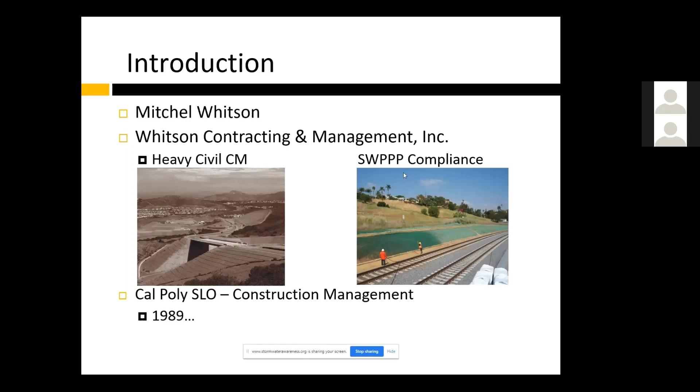We've proven time and time again that if you implement solid low impact development technologies, you're going to reduce the cost of the project and reduce the maintenance of the project - that's just a fact, proven time and time again. So we've always been a heavy civil CM firm. Normally in these presentations I'm talking about stormwater permit compliance - industrial, construction. Whitson Contracting and Management is about 95% construction, industrial, municipal stormwater compliance. Our construction management projects typically revolve around a design build project for a tank system or something along those lines. So we're embedded in the stormwater market.

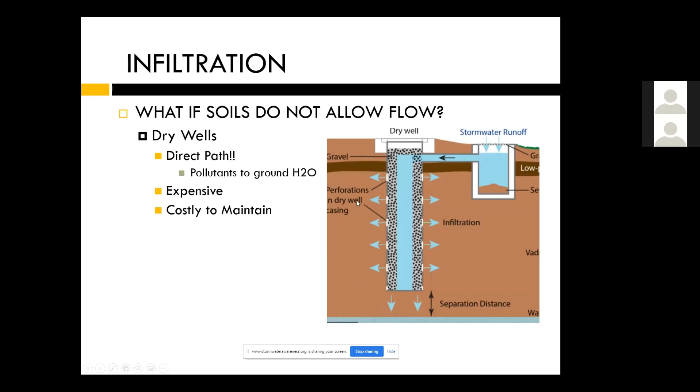Also, this is kind of a misnomer. It shows water infiltrating on the side, but not really. 98% of the water that goes through a system is through the bottom, because the weight of the water is forcing it down. You get very little, if any, infiltration at the very top of the system. So they're expensive, they don't really work, and they're costly to maintain. It's a hole in the ground filled with rock. I see some people put fancy little structures on them, which is fine.

Well, if we're really trying to infiltrate, there are technologies. If you guys are interested, please reach out because we can do deep dives into different types of technology. In fact, we host webinars every Wednesday at noon where we go over permeable paving systems, low impact development, structural solutions, storage infiltration systems, and filtration systems in a running loop.

One of the technologies we talk about in our infiltration and storage session is a product called Parjana. It's difficult to get into fully in this short time, but in essence, we drill basically 1 3/4 inch holes and put a 1.5 inch tubule in there. We put caps on top, and you get this micro-collapse around each one. What happens is water leaves this top area, flows down the tubule, and starts to saturate that zone. Because they're put in a 2-foot grid, with 5, 10, 20, and 40-foot grids laid out, we're changing the flow characteristics in impermeable soils.

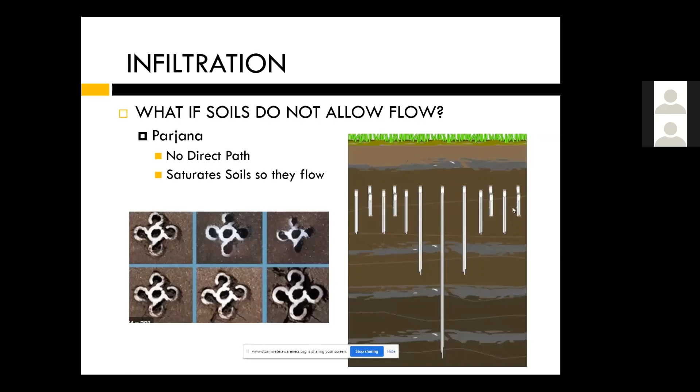So we've got a job going on in Stockton where we took a site with less than about 0.03 inches per hour infiltration and we're going to bring it up to just about 1 inch per hour, for $200,000. That seems like a lot of money, but considering the tank size reduction, because we now create infiltration, it's worth it.

Here's an example of the power of the technology. This is a job done for the city of Fresno. They did pre-Parjana, they had an infiltration basin, and they were losing all of their water due to basically evaporation — 70% of the water in that recharge basin was being lost. When they installed it, over the span of 2,500 days, several years, they only infiltrated 29.82 acre feet.

Within less than a year of doing the Parjana system, we're testing the groundwater. There's no direct path from the top to the bottom. It's going through the soil, so it's actually being treated as it goes through the system. We've now infiltrated 69.72 acre feet of water in less than a year.

So instead of only infiltrating 30% of the water, we're now infiltrating 90.47% of the water. There are technologies, even with non-permeable soils, that you can implement to actually achieve good infiltration. Again, fairly complicated—this is a presentation all on its own. If you guys are interested, let me know, but this is a really neat system. It's changing the way we're managing projects. We're reducing tank sizes, we're reducing basin sizes. We're doing some pretty significant things with this technology.

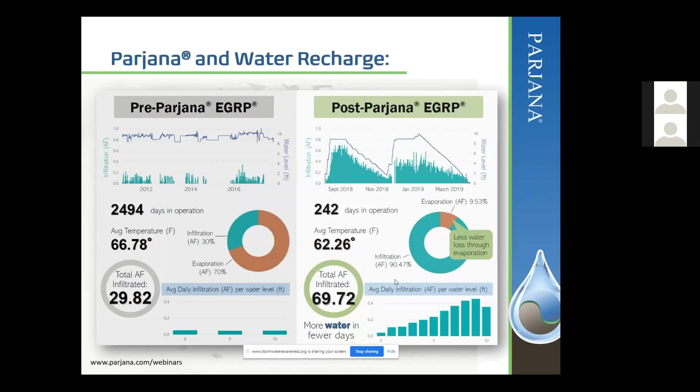If you can't infiltrate, then somebody a long time ago coined the phrase bioretention. So let's just do a bioretention basin, we're going to mimic nature. You know, I don't like the term bioretention, and the reason is because what they've done is combined two distinct concepts, two separate concepts. One is water quality, one is volume reduction, runoff reduction. And they tied these two at the hip, saying they're not interchangeable.

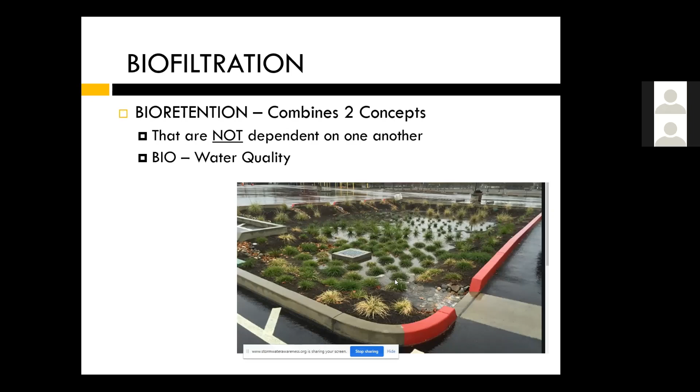You can take these apart, and you should take these apart, because you don't necessarily have to have a 5-inch-per-hour basin to work. In fact, I just built a winery project where we were the construction managers in Riverside County. It's got an industrial general permit, so we've got to deal with phosphates, nitrogen, nutrients—those things that come off industrial properties. We're discharging into a water body that's impaired for nutrients. And they say, okay, you have to do this basin that's 5 inches an hour, and the county spec is 60% sand, 40% compost, or 40% topsoil.

Prove to me that that's going to reduce pollutants. Also, more importantly, what happens when compost dries up and then gets wet and dries up and gets wet? It releases nitrates. So you're actually being forced, because you've got this dumb blend recipe of topsoil and sand, but there's no proof that it actually works.

There's probably some studies, but the system that I put in on my project—I used a certain blend from some guy out of Orange County, or actually Corona—show me the test data. I talked to all of these guys that produce this compost mix, this bioretention mix. Ask any of them for lab results. You're not going to get a very good response, because what they're doing is following a blend, and there's no proof in the pudding.

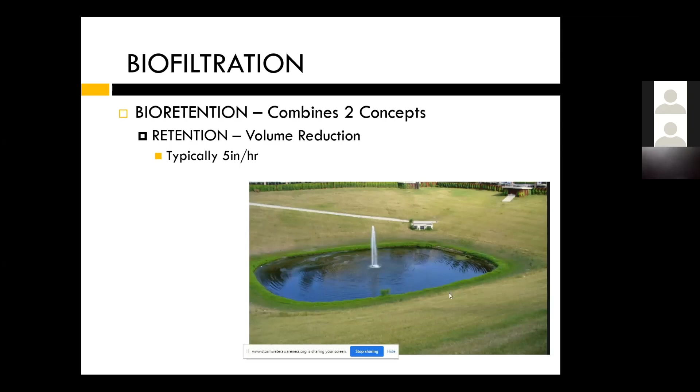So anyway, you can treat water quality at a high flow rate. In fact, you're going to get better results. You don't have to go 5 inches an hour to control the water. So they've taken two concepts and forced them together, and that's just not a good equation in my mind. It takes a lot of land. So biofiltration—we're 20 to 30 times smaller in our footprint.

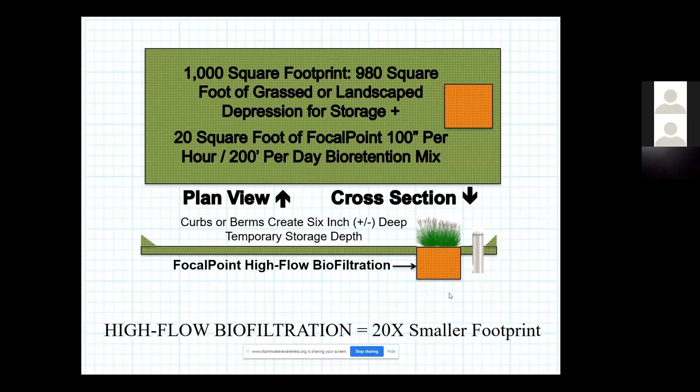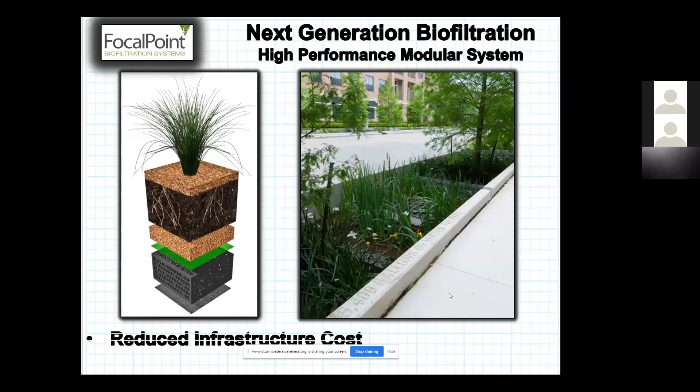Anyways, I'm going to keep going here. So we do have high flow biofiltration—you do not have to go low and slow. Sorry, I don't like animations. We also have a biocarbon. So we have a TAPE-certified high flow biofiltration system called Focal Point.

Focal Point is basically Filterra without a box. The gentleman that invented Filterra invented our media simultaneously. Filterra's patents revolve around their box, but you don't want media in a box. Why do Filterra systems fail? Because you're putting a tree in a concrete box.

So anyways, same media, same results. In fact, better results. I'll show you some information in a moment. But yeah, we do have a solution, high flow biofiltration, not in a box.

We also have a high flow biocarbon solution. We're going through the process of finalizing our submission for TAPE, but it's a proprietary blend of biocarbon.

Carbon's awesome, and the reason we really like carbon is, think about your Brita water filter, think about the water filter in your office. That's carbon, that's all it is. The reason carbon's gotten a bad rap is because there's no consistency in the process of producing it, and there's no consistency in the source material.

We only use Evergreen biocarbon out of the East Coast. It's a very consistent source, a very consistent manufacturing process. More importantly, all of the information, all of the studies, all of the universities, they all use Evergreen biocarbon. So when you're reading papers on carbon, you're reading on the only source we use, which is Evergreen.

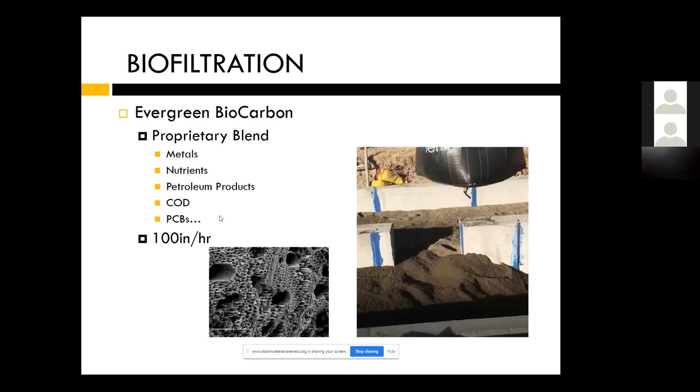It actually treats CODs. Our blend is specifically made to treat COD and BOD at wastewater facilities. So anyways, great product, let us know. Better for industrial applications because we don't have TAPE certification on it or an equivalent study, but we're in the process of doing that.

Filtration. So if you can't infiltrate and you can't biofilter, that's why you never see this in the development side, because the lowest letter in that rung, the lowest chain, is filtration. So filtration works, but the problem is it's a very site-specific, pollutant-specific model. What are you trying to treat?

Because different pollutants capture things for different reasons. So are you impacting? Are you intercepting? Are you absorbing? Are you doing ion exchange? Are you capturing? There's various technologies of filtration, so it's a very site-specific, pollutant-specific model.

We've got some cool filtration products. We've got the only licensed or certified antibacterial filter in the state of California, and the reason is it's a Fabco called FabGuard. It actually kills the bacteria. So the reason no one else has California Department of Pesticide Regulations certification for bacteria is because it's some type of capture or absorption technology.

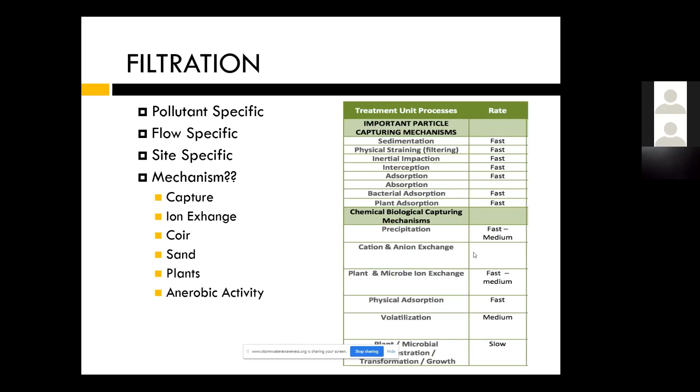So you're capturing the bacteria. You don't want to become a bacteria bed. Our Fabco system actually kills the bacteria. That's why it works. So we have filtration products.

Continuing along the vein of low impact development, this is a pretty important concept: decentralization. So what are we doing?

We've always designed storm drain systems by capturing that water, piping it to a standard pipe, piping it off that job. Old school technology, understand, but you go 12 inch, 15, 18, 48, and then you do that for a lot of reasons. One is you want to limit the number of discharge locations from a particular property. You also don't want dozens and dozens of manholes leaving a property because it's costly. You want a single one or two points of discharge off of a project.

Well, then all of a sudden we come around and start changing, like hey, guess what? In 2009, the runoff coefficient off a project pre and post development should not try to be equal, they must be equal. So what did we do?

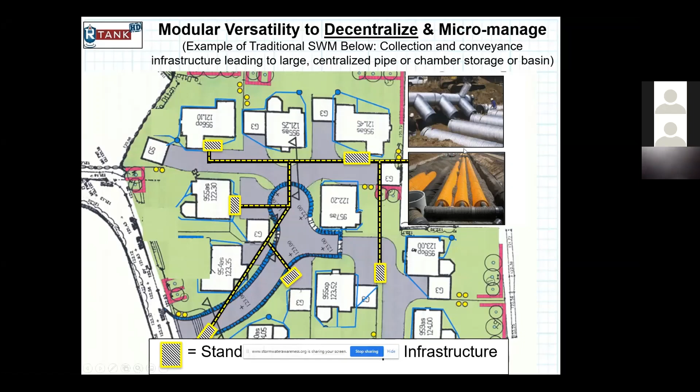We started building septic systems. We started taking lots, we started doing basins. Okay, these are 60% efficient because you've got 40% void space and you've got these pipes. So it's basically about 60%, I think it's a little over 60% efficiency of the system itself, what the void capacity of the system is.

We could do that, we could do it with an R-tank. We're going to reduce the size of your system, and the reason is we're 95% void space. So instead of 60%, we're going to reduce you by a minimum of a third. More importantly, we're not bound to be a wide flat system, we can make it look like wherever we want.

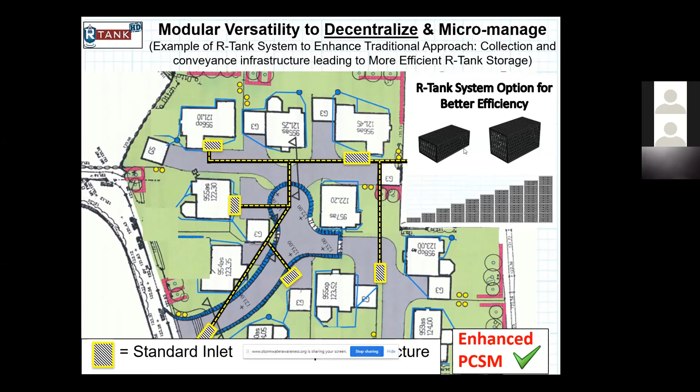Oh, but it's also modular, so we can put it wherever we want. So why are we taking lots? Why are we building big septic systems on projects? Why are we building vaults? It's ridiculous. We shouldn't be.

We should be treating DMA by DMA. We should be taking the individual drainage management areas, treating at the source, and containing at that source. Because what it's done is you've gotten rid of that vault. But as importantly, where's my storm drain system? You're eliminating your storm drain systems, or at a very minimum, reducing the size of your storm drain system.

So when I capture the water in this drainage management area, I can do my biofiltration through a focal point right here in this guy's planter bed around his park or in the front of his driveway. I can do an expanded R-tank underneath, and I basically capture both the water quality and the water volume off of this lot before it leaves. So even if there is a storm drain system, that system is going to be greatly reduced in size at a very minimum.

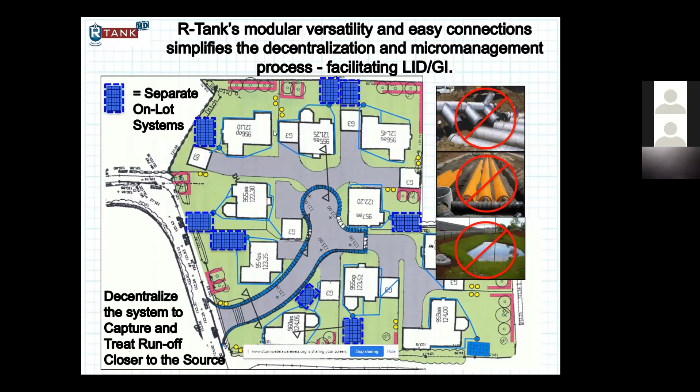So decentralization is a key concept when it comes to low impact development, and we need to really pay attention to that. Stop piping things to a big vault. Stop piping things to a septic system. It's silly. There's no reason we should be doing that.

One thing to really pay attention to, and here's a great example of the next concept I'm going to get into, which is permeable paving systems. Historically, we look at permeable paving systems, and the reason they're not popular is they're costly. People look at them and go, okay, I want a permeable paving system, but it's going to cost me $5 or $6 to pave this with asphalt. Pavers are going to cost me $10 to $15, $12 to $15. Why am I going to pay 2.5 times the surfacing cost versus an asphalt pavement? It doesn't make sense on the outside.

But if you consider the impacts to water treatment, water quality, and the runoff reduction component of the equation, permeable paving systems are the way to go. Here's a model of a job we did in Orange County, flowing through a focal point system, then into an R-tank. Everything goes through here. We have 250 square feet of focal point and a 5,300 cubic foot tank. That's the traditional model.

Okay, great, let's incorporate pavers. Let's incorporate, truly not a paver, I hate the word paver, but a permeable surfacing that's truly permeable. We're going to cut your cost by half. The reason is, while this is $10 and twice the cost of that asphalt, I've now created a giant pond above my treatment system. So I have surge capacity. I can hold that water before it goes through my system, much like I was telling you earlier with decentralization.

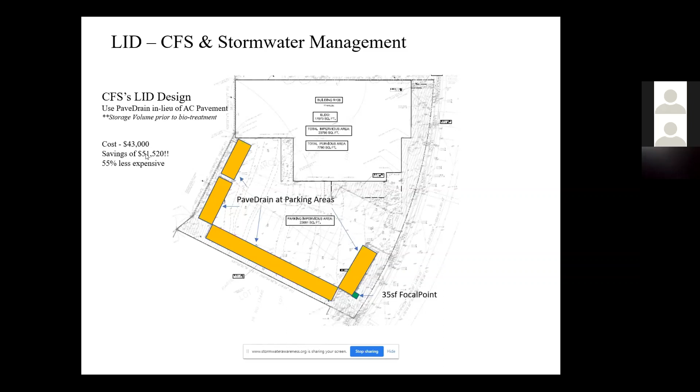Hold on to that water where you can, then slowly release it into your system. Your system is going to go from 200 square feet to 35 square feet, and you're going to save about half the money. So on the outside, paver systems don't make a lot of sense because it's like, well, I'm not going to spend $12 when I could spend $5. But think about the reduction in your storm drain cost, the sizing of your storm drain cost, the size of your biofiltration systems. You're reducing all of those across the board by implementing solid permeable paving technology.

So Whitson, California Filtration, is part of a network of regional manufacturers. We have tens of thousands of systems installed throughout the country. In California, we've done hundreds and hundreds of systems now, dozens of biofiltration, dozens of tanks, dozens of filtration systems. When I first started this, everyone's like, has Escondido done it? And then Escondido says, has San Marcos done it? I know we want to make certain the person next door does it, but we have now. So if you have questions about where we've installed or designed, let me know, we're absolutely installed in a neighboring community or in yours.

Talking about pavers, so why don't pavers work? Pavers don't work for a few reasons. The biggest reason is the void space. Even on permeable concrete or permeable asphalt, look at the void space, all the water is being forced through. So what they do is take pavers and fill these gaps in with aggregate.

Or with sand. They sweep sand into those joints. You're reducing the void space.

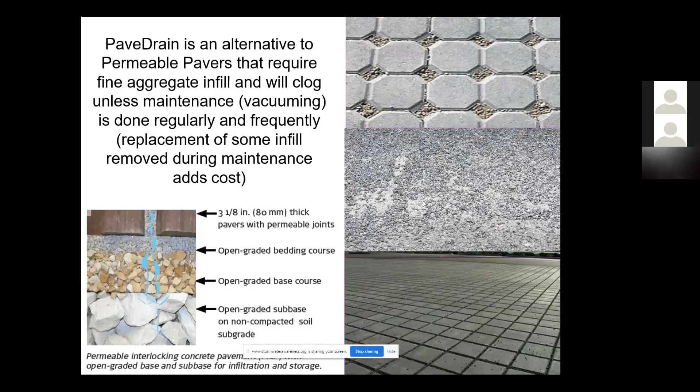Permeable concrete, I think, is ridiculous. Whoever does permeable concrete is just, why? Go to any parking lot that has permeable concrete, turn a tire on it, and watch that concrete dissolve. So A, it's going to clog. B, it's going to crumble. It's just not efficient technology.

Small pore space. The other thing that's a problem here in California is it's not like the East Coast, where you get 85% of your water from the 85th percentile storm. We get all of our water from very isolated storm events. We get 85% of our water from the 15% storm.

That means, you know, look at it. It's basically 0.02, 0.02, 0.3, 0.1, 0.4, 0.6, 0.1 inches here and there. So we basically get 8 months of dust going into the pores of this permeable system.

Then you get this sprinkling of rain. You get that 3 hundredths of an inch in September, that 100ths of an inch. And we take that dust and turn it into goop, and then we basically solidify it. Then all of a sudden you get one rain event and you're hoping it's going to flush the system. It's not. You're going to clog that system.

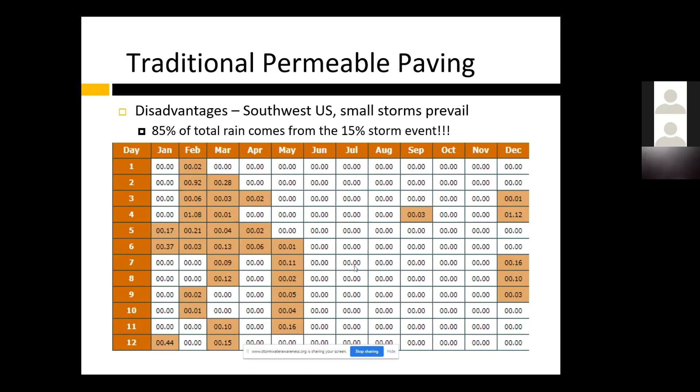In fact, the Brookings Institute says infiltration rate of porous asphalt and concrete will exceed 2,000 inches an hour when new, but long-term rate will fall as low as 2 inches per hour. So you're basically doing something you think is going to work, which you know for a fact is going to fail over time. So why are we doing it?

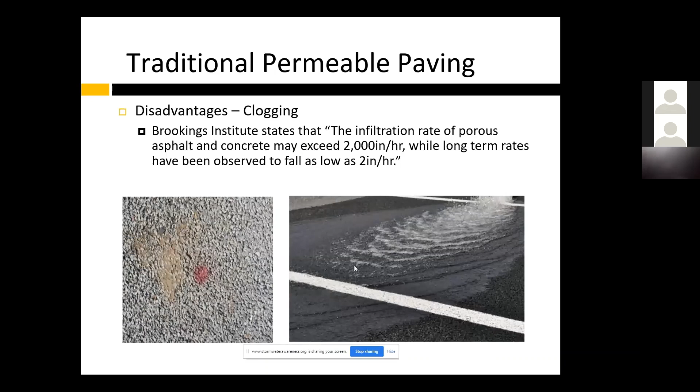We're wiping sand into our paving systems to lock them together. Paver systems are expensive. Why? Because we have to use an edge restraint, do variable surfaces, lock them together, put sand into joints. It's just super expensive, and it's a system designed for failure.

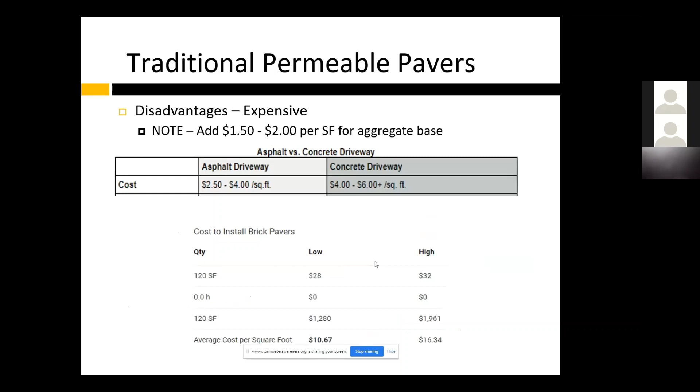Traditional paver systems, again, it's generally more expensive than asphalt. Oh sorry, I already did that. Sorry, I threw a couple presentations together at the last minute.

Instead of going with a paver system, go with a block system. Our PaveDrain block system always has a quarter inch gap. The flow rate is over 1,500 inches an hour, and it just doesn't clog.

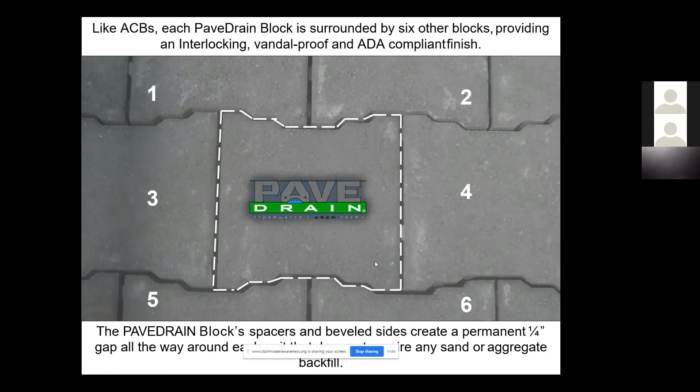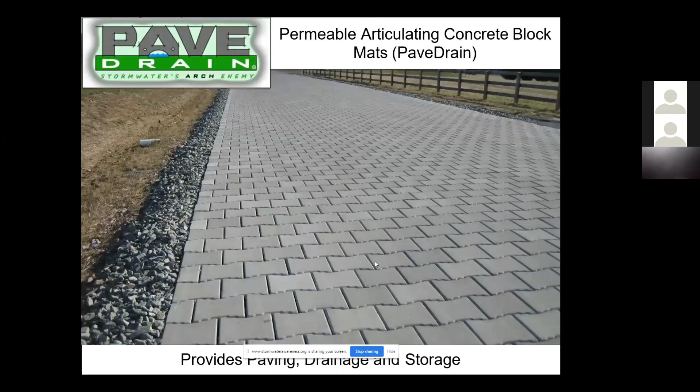The material cost is more expensive than the tiny little blocks. This is like $3 or $4 a square foot for the material. We're about $6 for material, but our placement cost is so small because I don't have to do an edge restraint, I don't have to put a curb next to it. So it's always got a quarter inch gap.

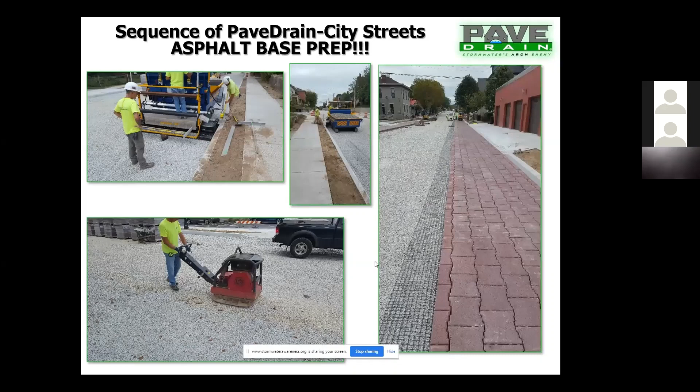It doesn't clog. We put down a base section, we put down the geotextiles. We always bed it on geotextile.

Go to a paver guy and ask him if you could pave right next to his block. I know the answer, and it's no. We want you paving against our block. It's a 50-pound block. We want you locking in the system. It's as structural as the asphalt, probably more structural, but you can pave next to it.

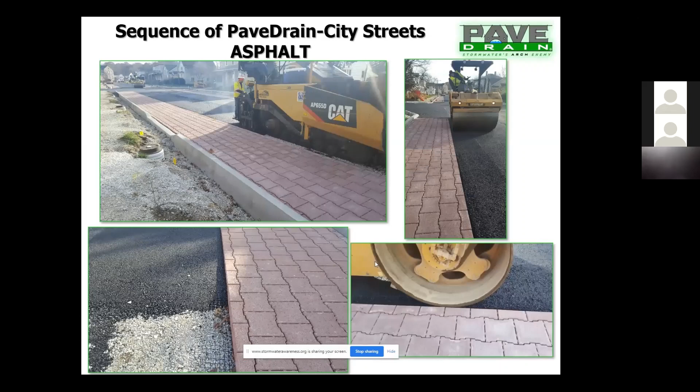You could drive on it. You can put the wheel right next to it. We want you paving next to our system. We don't demand a concrete curb around it so it doesn't clog. What do you get? An architectural element that reduces the size of your storm drain system. In fact, it becomes your storm drain system.

Do your parking stalls, we'll do enough. If you have permeability in your pavement, we're just going to do enough permeable pavement to infiltrate all the water you have to infiltrate. If not, we're going to use this as an actual storm drain system. We're going to break that subgrade one way or another, and flow it into a biofiltration system, just like the model I showed you earlier.

But now you have the same color palette you do of any other block, but you actually have a block that's functional. Pool decks, trench drains.

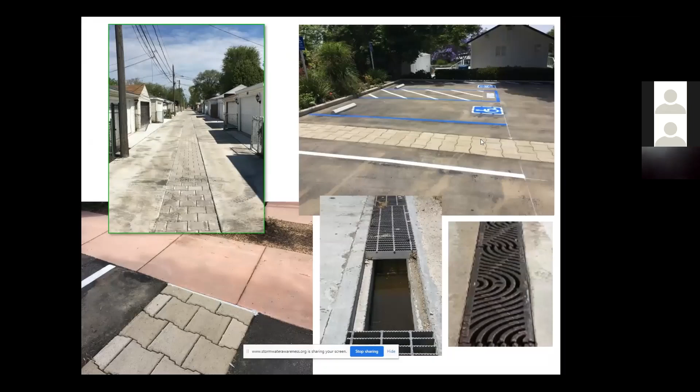Why do a cross gutter down an alley to flow off a project? Instead of using trench drains, why not use PaveDrain?

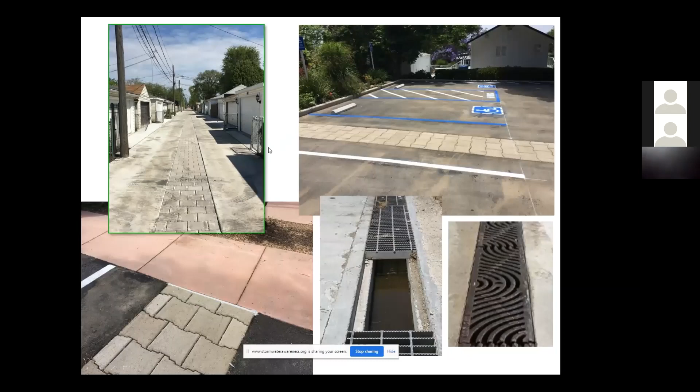This is a project in San Jose on First Street. Historic facility, a lot of flooding. They were going to spend $27,000 for a trench drain across this parking lot. Instead, we talked them into putting a $7,000 PaveDrain across the parking lot. We just line the bottom with an impermeable liner, put a perforated pipe in it, it flows into the trench drain. We're done. It's a really simple solution.

Edges of roadway, sides of roadway. We're doing a bunch of this up in the LA area where they want more permeable surfacing. This is heavy duty traffic loading, and we've gotten rid of all the gutters and all the other stuff.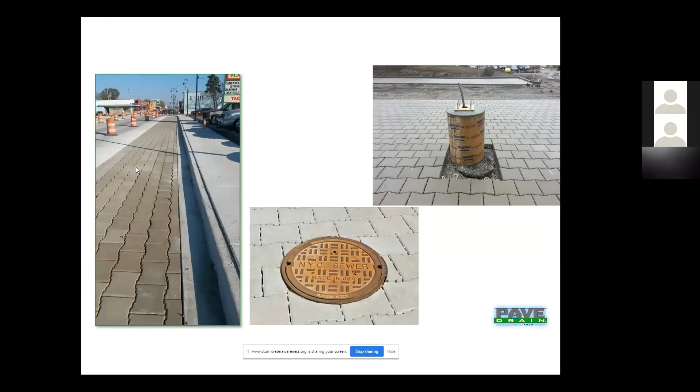This one's interesting. This shows you the power of paving. At the University of Central Florida, they wanted to figure it out. They said, okay, let's see how bad it is.

They filled it full of silt. They soaked that silt in, raked it in, clogged it in, and vacuumed it out. And it was still over, well, we started at 2,000 inches an hour, and then we're still over 1,800 inches per hour. And that's trying to destroy the system.

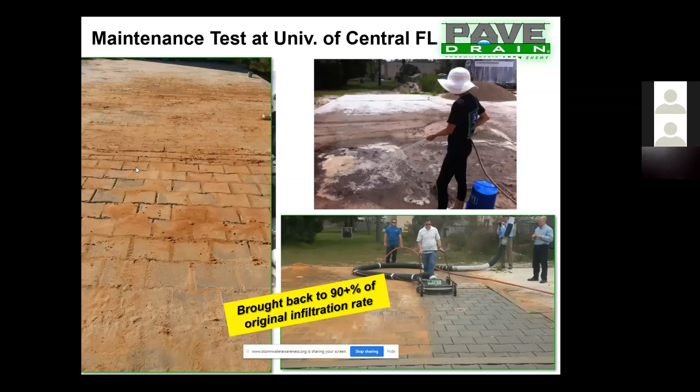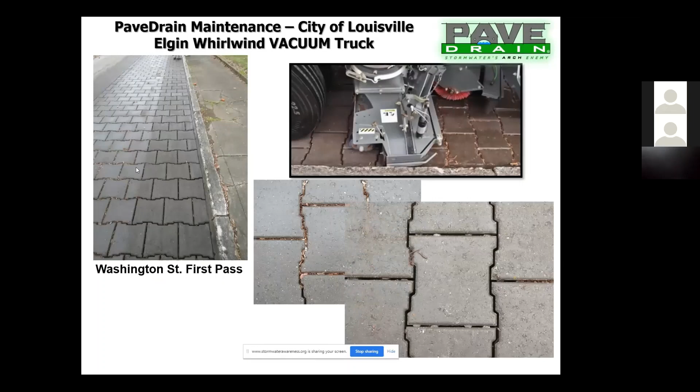We have systems up in the Sierras where they've done no maintenance. They just drive over it with a street vac, instead of using a street sweeper, actually use a street vac. Look how dirty that is on the front end. Drive over it with a whirlwind, an Elgin whirlwind, and it gets rid of all of that pre and post. So it doesn't clog, it just draws normal routine maintenance, and you have a paver system that actually functions.

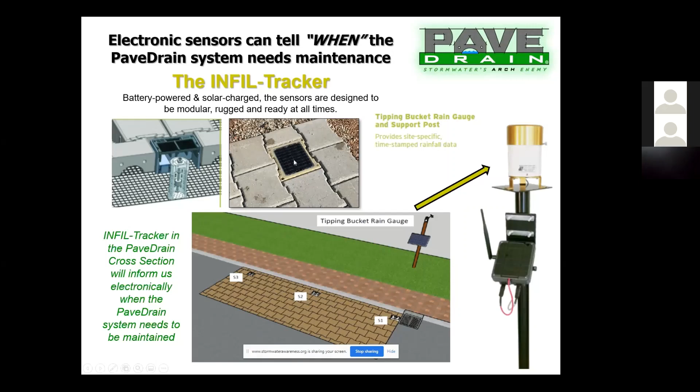If you guys are interested, there are grant funds out there for municipal people if you're actually trying to capture water and put it back in the ground. With our system, we could give you real-time data as to the amount of water you infiltrate with the PaveDrain system, using sensor blocks in our system, so we could basically track the amount of water you infiltrate back into the ground.

We have another permeable paving system. I'm going to go quick. This one's awesome, and the reason I like this one is because it's less expensive than asphalt. It comes with a 25-year manufacturer's warranty and is equivalent to 6 inches of asphalt over a structural section.

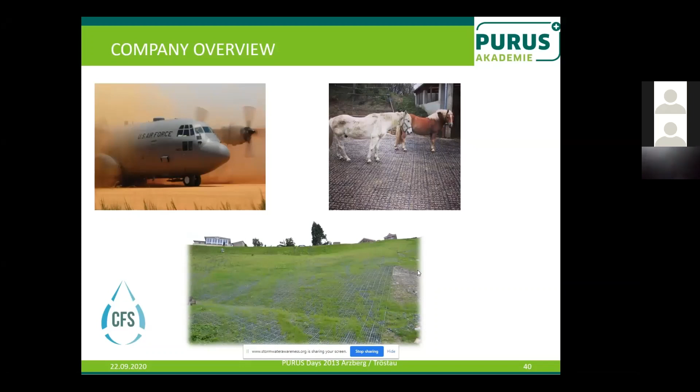The U.S. military lands airplanes on it throughout the world. It's what the U.S. military and NATO use at forward operating bases. We use it for equine facilities, slope failures, channel lining. It's 100% open grid, and it locks together.

It's a low density polyethylene, so it doesn't break, it never becomes brittle, it won't fall apart. It basically flexes and moves, but it doesn't fail. Because it's a low density polyethylene, it moves a little bit, but it's basically equivalent to 6 inches of asphalt. And you want to talk about sustainability?

It's made out of 100% recycled plastic bags. This grid is made out of 100% recycled plastic bags. I'll show you another version of it in a second, called blocks. Instead of using concrete blocks to fill it, we're using 100% recycled tire rubber—well, 95% recycled tire rubber with a binder. So now you have a paver system that flows at over 3,000 inches an hour, won't clog, is less expensive than asphalt, 100% permeable, has a 25-year life, and is made out of recycled products.

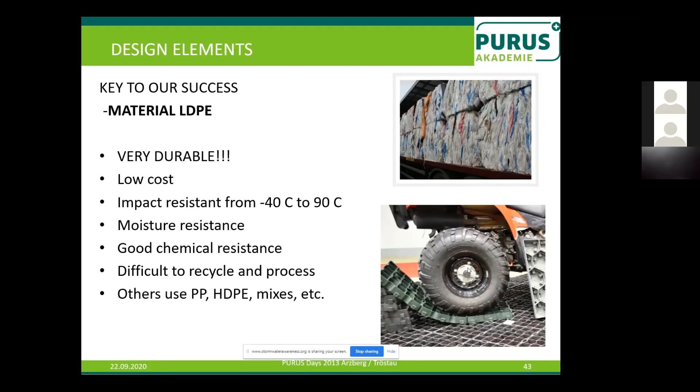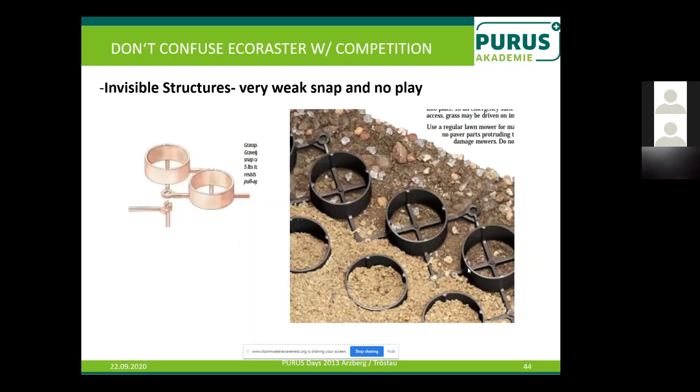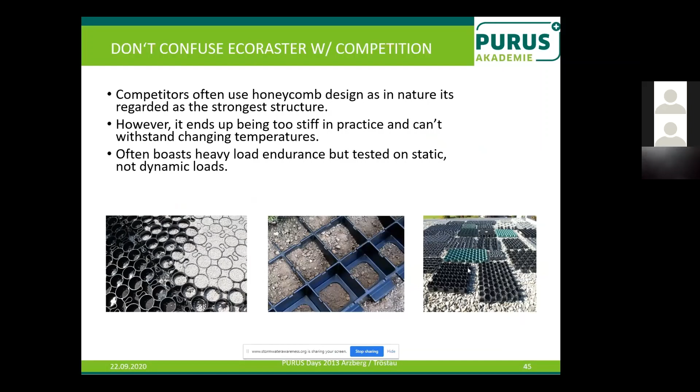Don't confuse EcoRaster with all the other nonsense in the market. It's a complicated system—it's high density polyethylene, and it will fail, and it'll fail immediately. Any of these grid systems, if it's not a low density polyethylene, avoid them. They're going to claim they're going to last. They're not. We've got 25 years, we're going to give you a warranty, because we've never had a failure in 25 years.

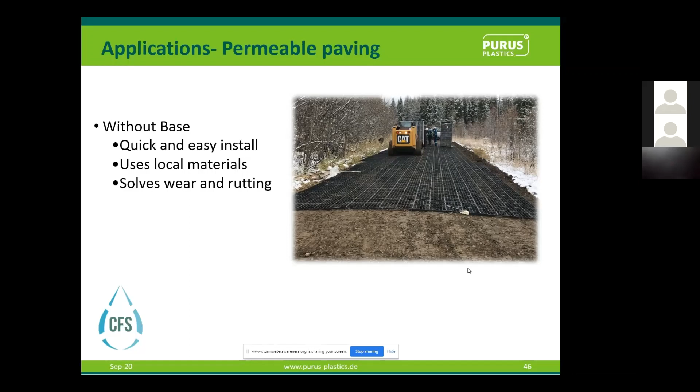So what do you use it for? For access roads, temporary pavements, these types of things—they use these at fracking sites and oil recovery sites up in Canada. You basically grade a road, snap this down, drive heavy trucks over it for 5 or 6 months, then they pick it up, unzip it, put it on a truck, and move it to the next one. So it stabilizes even areas where you're not even putting down a class 2 aggregate.

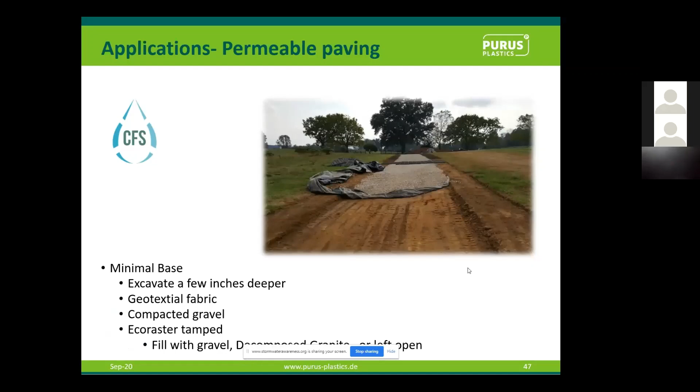This is traditionally what we do: we dig a structural section, put down a geotextile membrane, a crushed rock bed, and snap this on top. So what are we doing? We're doing parking lots out of it. This isn't the best—this is actually the most structural version of it, but it's a 100% permeable surface.

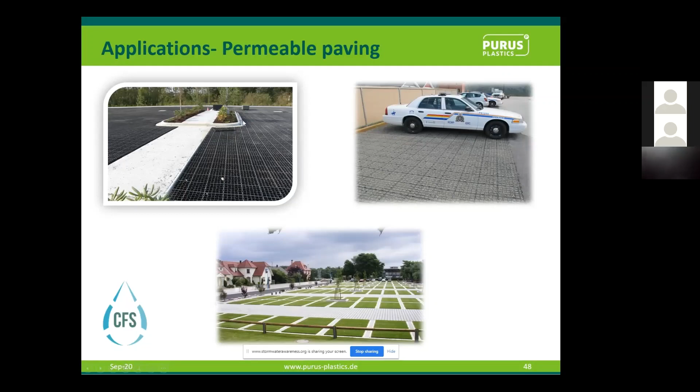We fill it with 3/4 inch crushed rock. It holds all the rock in, and the water goes directly into the system. You get drivable surfaces, drivable grass, or you don't put anything in it. I did this so you can actually see we cut it—we can cut around joints and stuff. Clearly it supports heavy loads; in fact, I think they want 72,000 pound axle load for fire trucks.

We're 172,000 pound load rating on our system, so that's 2.5 times the fire truck ratings that Ecoraster will support.

The best way to look at this design-wise: if you've got a 3-inch asphalt section over a 4-inch aggregate base, Class 2 aggregate base, as long as you're using 3/4 crushed rock with an R value over 75, you can replace that Class 2 with compacted 3/4 crush, get rid of your asphalt, put down Ecoraster, and now you have 100% permeable surface. No changes in structural section, nothing. You're just replacing asphalt or concrete with this, and you've got 100% permeable surface versus one that's not.

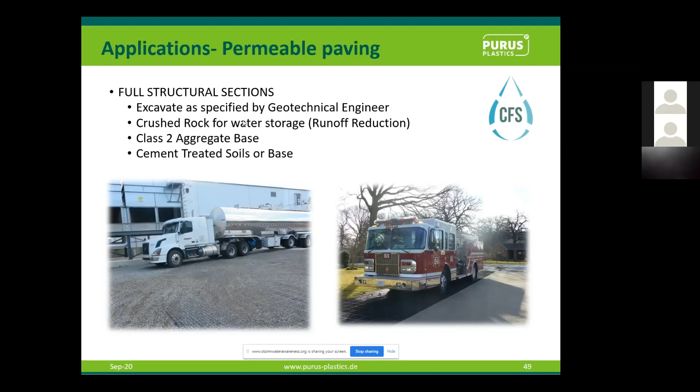Bank stabilizations. This is a 45-degree slope on the left-hand side. It's a slope failure. They just strapped this down, and it hasn't moved in 10 years.

Channel linings. In Arizona, we're doing channel linings. The Corps of Engineers doesn't want us using hard armor on slopes anymore. So why not just strap this down, pin it onto that slope, and let the vegetation flow through it? It's a great channel liner. I was talking to someone from the city a few years ago about Chollas Creek. This is a perfect solution for them at a fraction of the cost of a riprap lined channel. Just grade it, snap it, walk away.

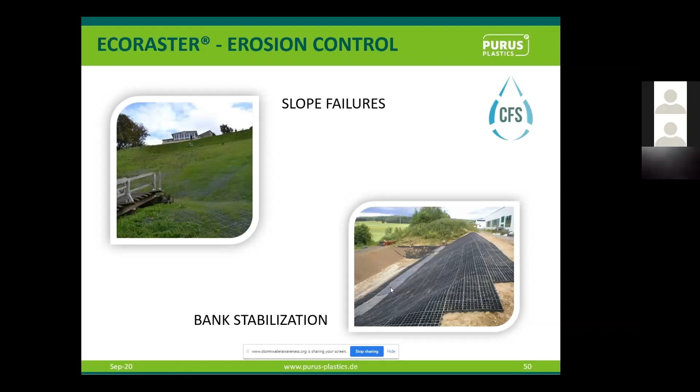If you want something more attractive, we can change the aggregates, but also there's ADA compliance. This is the block system that we have. It's got the same thing, over 3,000 inch an hour flow rate.

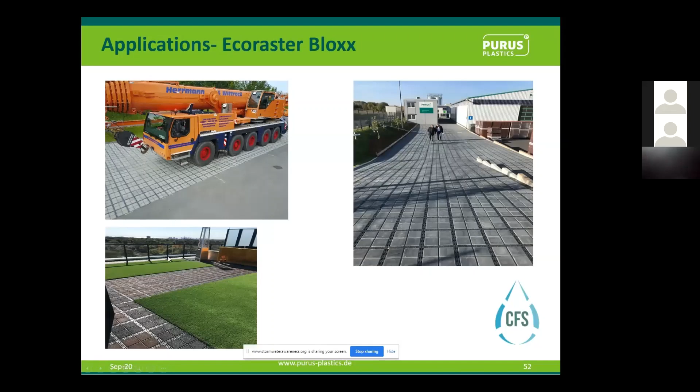The water flows into the channels around the corner. We put 4 blocks in there. On this side, you can see the rubber, let me change this real quick and blow it up a tiny bit.

So now we have a Cal grant study. We actually have a grant from CalRecycle. We've figured out how to do this, well, we're figuring out how to do it locally in California. But what was really neat with the person we're working with, who developed the tire-derived rubber compound, is that it's 100% permeable rubber compound. So not only does the water flow through the system itself, it's actually flowing through the individual blocks.

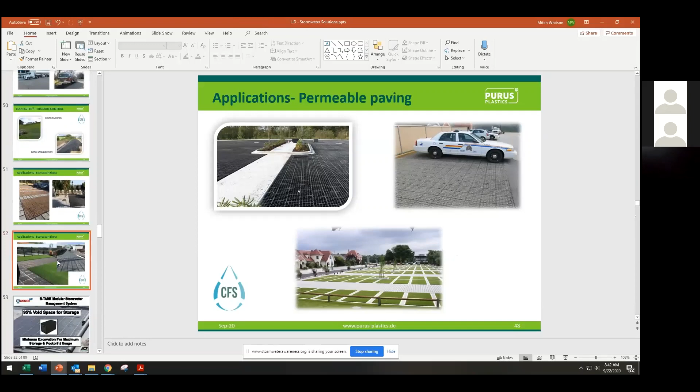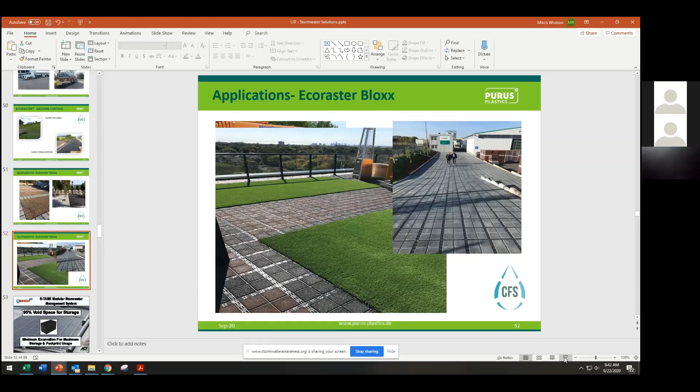This is a little more expensive than, say, this grid system. This grid system, the material cost is about $3, placement cost is less than $1, so you're talking $4 or $5 to put this down. You're talking $5 or $6 for asphalt, so we're cheaper than asphalt. Here we're a little more expensive, probably closer to $7 or $8 in the ground, but we're competing with structural concrete. So instead of concrete, you now have a structurally equivalent section that's 100% permeable at the same cost. That's why I like Ecoraster, and the reason is because of a cost point. It's got to make sense financially.

Storage systems, storage infiltration systems. I've got about 10 minutes, so I'll be quick. The difference between us and others is a lot of people don't like modular cell technology, and the reason is there's been failures. In fact, we're building a 900,000 cubic foot tank in Visalia between now and the end of Christmas. We can build massive systems cheaper than concrete, and timing-wise we can meet their aggressive schedule.

But the reason people like our system versus everything else is because we've never had a failure. In fact, as soon as they announced to the industry that we're going to build this $4.5 million tank, all of the competition came out and said you're going to put people's lives in danger, you're going to hurt people. They gave these 4 studies of failed systems, but none of those systems were ours. In fact, 2 of the systems they brought to the owner's attention to try to scare them away from our technology, our system replaced the system that failed. The reason is we're the only system that bothered to get third-party ASTM and third-party AASHTO certifications. So all of our loading tables, all of our quality control and quality assurance, we've never had a failure. And so we'll go deeper than other systems.

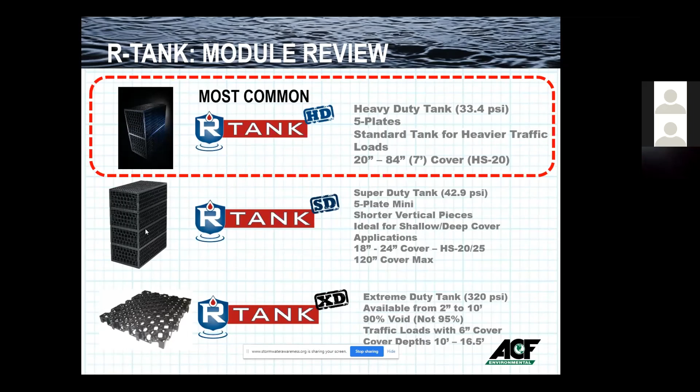We'll go more shallow than other systems. On my standard system, I'll start with 7 feet of dirt on top of it. On the job in Visalia, I got an 8.5 foot tank, so I'm down closer to 16 feet at the bottom. With my SD version, I can have 10 feet of dirt on top, and I could be as shallow as 18 inches above it. But I can go with this, I'll now have the bottom of my tank at 20 feet.

So I can go more shallow than anybody, I can go deeper than anybody. But what are we doing? We're doing the same thing that every other tank is doing. The difference between our systems and the other systems is what are we wrapping it in?

Are we wrapping it in, doing an infiltration system using a microgrid where we basically utilize all the rock and everything around and the water flows through the system? Are we doing just a normal storage system where we wrap it in woven or non-woven geotextile? Or are we actually doing rain harvest where we're welding and seaming the whole system together? It depends on what you're trying to do. But in a nutshell, we're basically able to, no difference, the system's all the same. Tanks are all the same, just what we wrap it in.

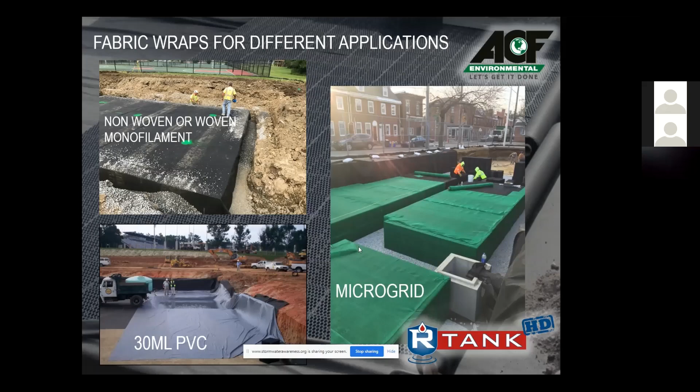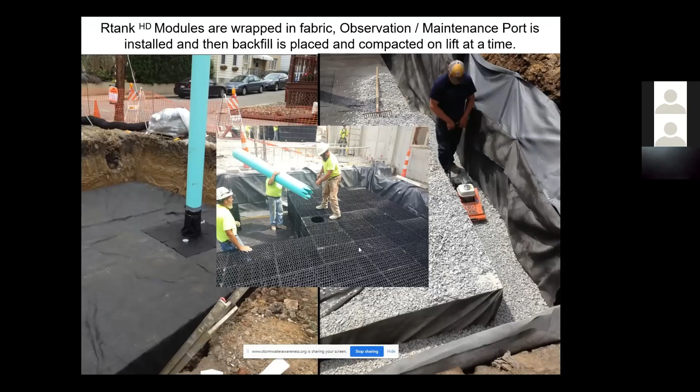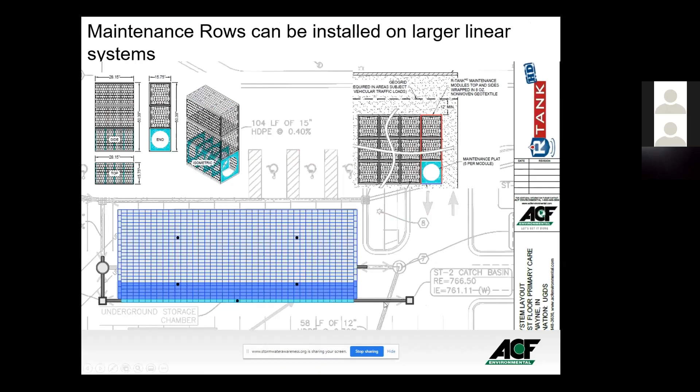Neat thing about our tank is we figured out all the maintenance. So we do maintenance ports, we do maintenance rows, we do 2 feet of crushed rock around, we compact our system in the ground, we protect it from the outside. We actually have maintenance rows where we can isolate the pollutants inside of a tank and make it easier to maintain. So we'll snake down the spine of this tank, or we'll just flush water in each of these portals and bring it through and run it. We maintain it like anybody else, any other tank. We can inspect, we can maintain.

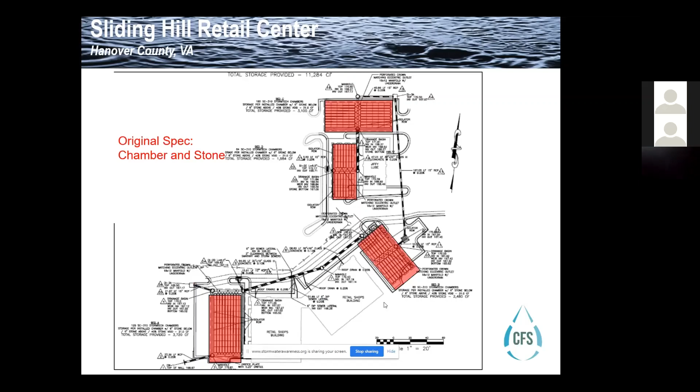This is a standard arch pipe system. Here's an arch tank. Look at the size of the storm drain system, look at the size of the pipes going between these. Think about the cost to build that Jiffy Lube, think about the cost to build these parking lots. When you're all of a sudden having to bridge over a system like this, it's going to be costly not only to install the tank, but also to pave on top of it, because you've got to change the design of the pavement above the system.

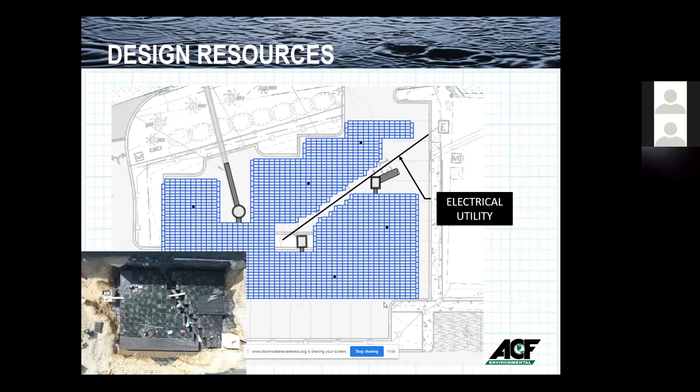So isolate that system. You don't have to be flat, you can be tall, you can be short. You can avoid utilities, you can even avoid utilities after the fact. Like this is a job we did where an electrical line went right through the spine of the tank. It's like, all right, fine, let's just build the tank around it.

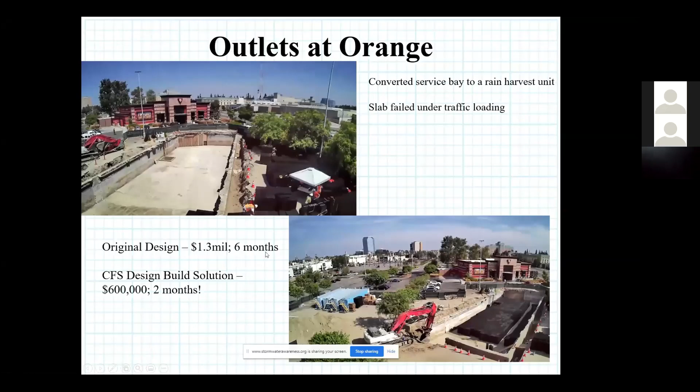Who cares? There's a job we did in Orange, city of Orange last year. They were going to tear up this entire parking lot, use Contech 84-inch vaults, torrent dry wells, modular wetland systems in this parking lot, about $1.2 to $1.3 million over 6 months. Or you can just do what we did, which is a design build contractor. We took this — it was a big giant concrete vault, a water harvesting system that failed because when they built this BJ's, all the construction equipment broke that tank. So you can be 6 months and $1.3 million, or you can be 2 months and $600,000. You decide.

Doing a lot of this in San Diego. There's a project, Tractor Supply. This one's interesting because they changed the grade after design, and this tank is now deeper than 7 feet, so they're panicking about how to fix it. Well, fine, just put another module on top. So we effectively changed the depth of cover above the tank to below 7 feet. Simple fix, less than $1,000.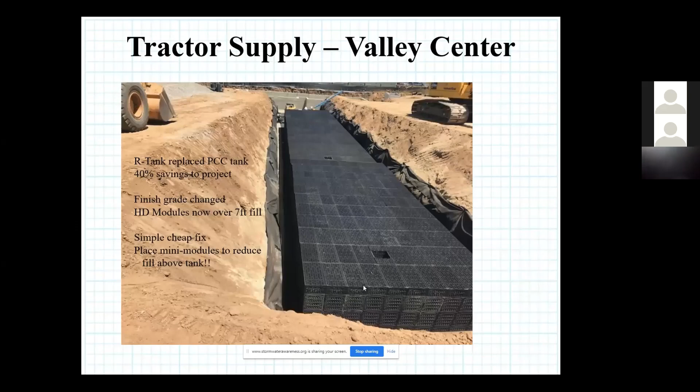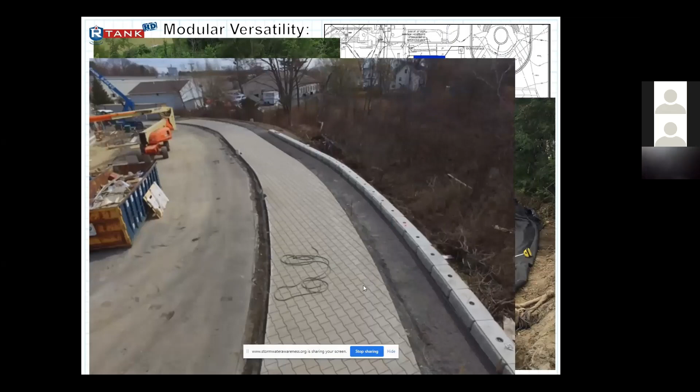So anyways, this is just the world we like to live in. Build a curve, build a system along a curve, you can stagger your tanks, put pave drain on top of it, sheet flow everything to your parking lot. Eliminate all your area drains, eliminate all your grates, think about the cost saved by eliminating all that storm drain system and just sheet flowing to a paver system.

We have trash solutions certified by the state of California at a fraction of the cost of what everyone else is doing. Everyone's doing automatic retractable screens, but it's a failed system. When we did this for the City of Thousand Oaks, I looked at well over 100 systems and 68% of the automatic retractable screens were broken. They were going to spend $91,000 to do what everyone else is doing. When we came up and changed the screen design with Trash Guard, we saved them about $64,000, which is a hell of a lot of money.

So go small, go decentralized, go simple treatment systems. Curb inlets into our biofiltration. Here's a good way to get debris and trash out of your system as you're trying to leave a project. We're doing a lot of these at Hotel Del.

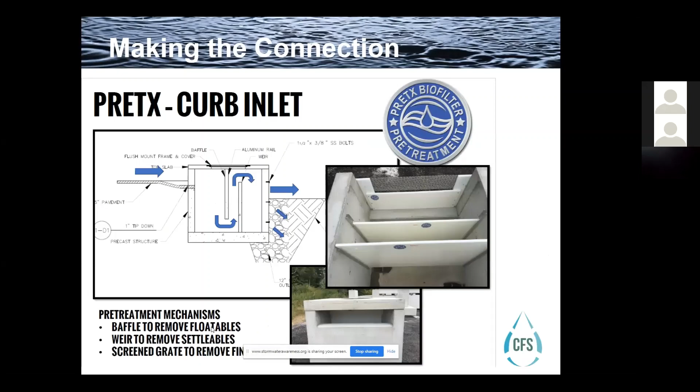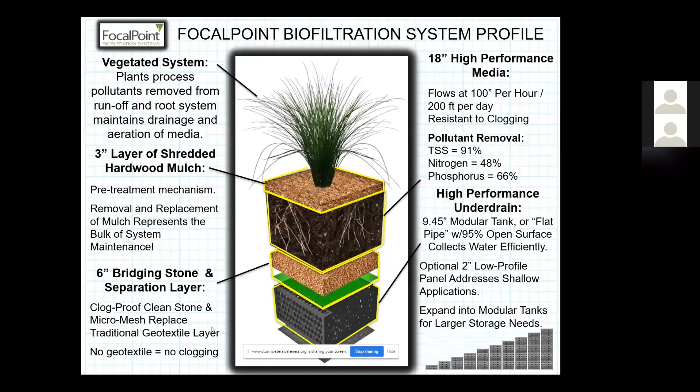Here's our focal point high flow biofiltration system. Modular, decentralized, same as I said, we've got TAPE equivalent certifications. We did a project with the Navy, and these are the results. We meet enhanced requirements for TAPE certification, and we have the Navy study to prove it. So we don't have TAPE yet, we're in the process working with the Navy to basically get the system approved, but we have the results and we have a TAPE quality study. In fact, we have two TAPE quality studies that show focal point will more than exceed the requirements of TAPE enhanced.

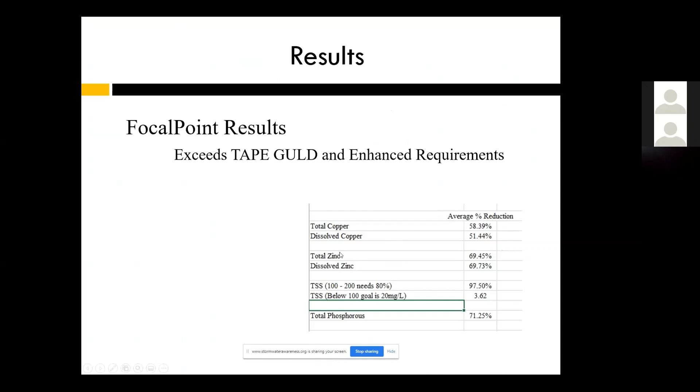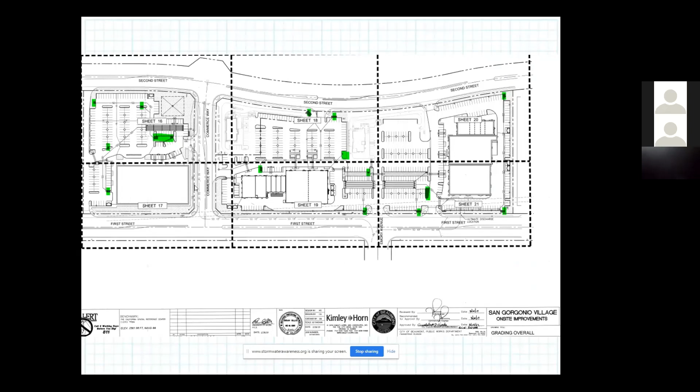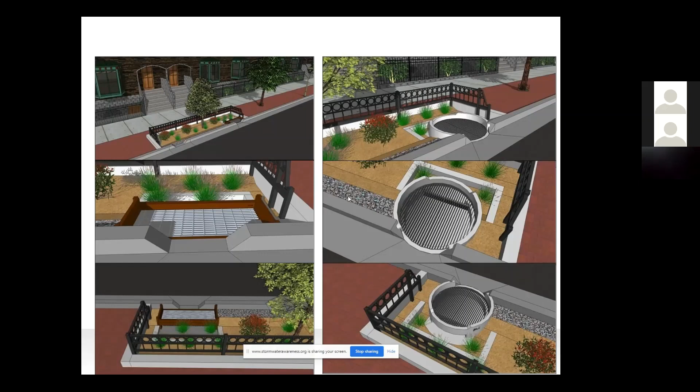We do a lot of streetscapes, and green street applications - we're working with the County of LA. The County of LA loves our products. We're doing several projects and several properties with the County of LA, Department of Public Works, on their green streets applications. It looks a lot like this - our tank below a focal point, doing water quality and runoff reduction.

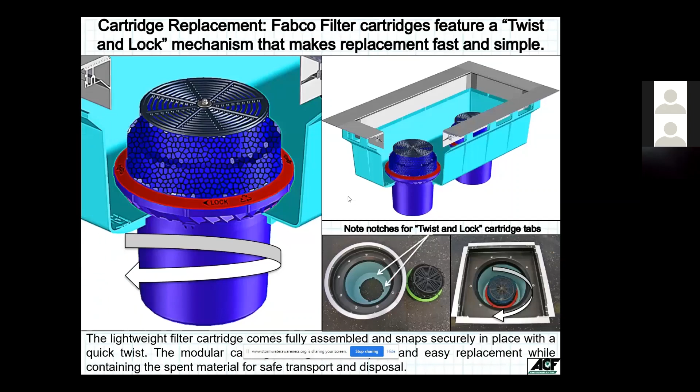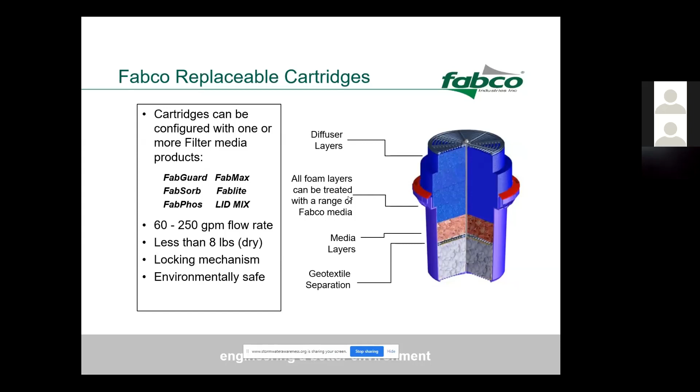This is our Fabco system - a cartridge-based system, but we kill the bacteria. We also do retrofits of existing storm drain systems. So instead of only having about 18 inches of treatment area in a cartridge, we can actually do 10 to 15 feet of treatment area if you have a really high bacteria issue.

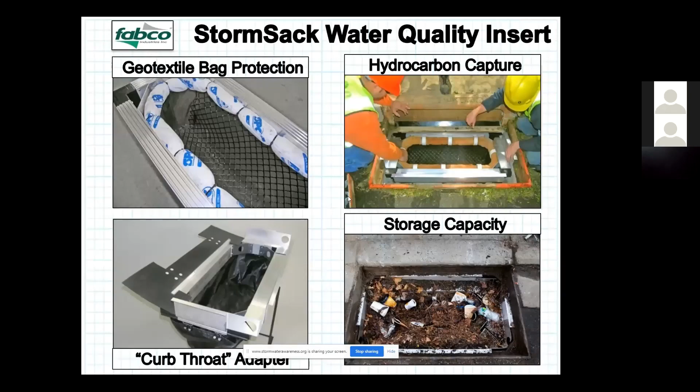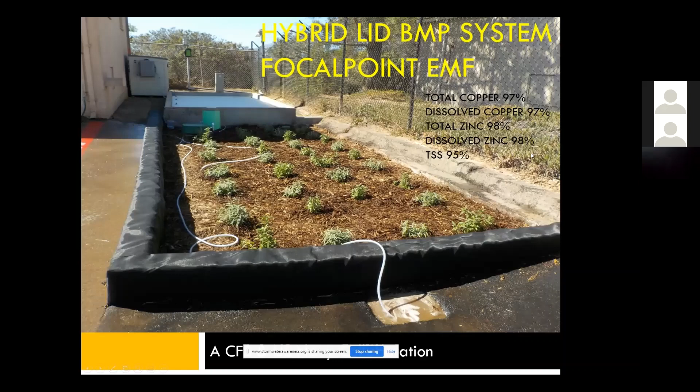So, trash solutions - if you guys really have metal issues, let me know. This is the system the Navy made. We control the Navy's patent. The Navy combined our FocalPoint because they felt it was the best, most high quality pollutant reduction - it takes out all the top pollutants. But then when they run through the Navy patented material, we're bringing both dissolved metals and suspended metals over 97%. So we're basically taking really crappy water and turning it potable.

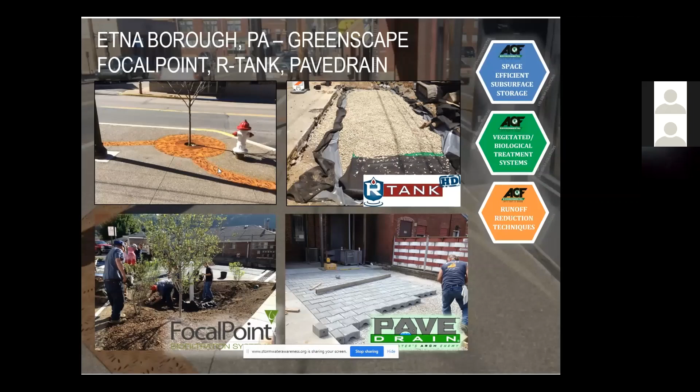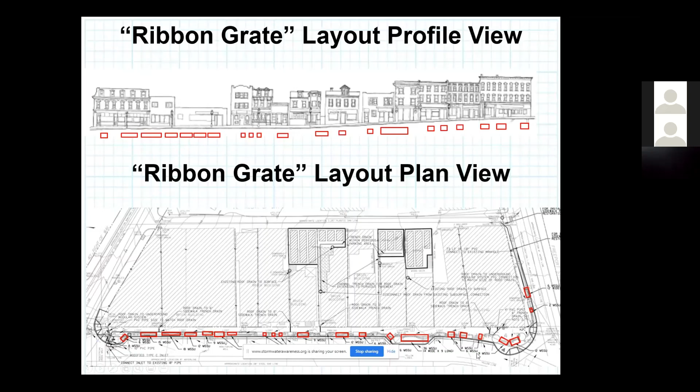So this is the space we live in, this is the way we should be designing. Here's a project that won ASCE and EPA awards. That's one system now - this looks much like the project we're doing in South El Monte, where we're taking modular systems. We're doing permeable instead of a trench drain, we're doing pavers above our tanks. That reduces everything and it all builds down to a tiny little FocalPoint at the bottom of the project. So we're doing all the surge control above the system, and then we're slowly reducing the system as we go down - award-winning, really cool project.